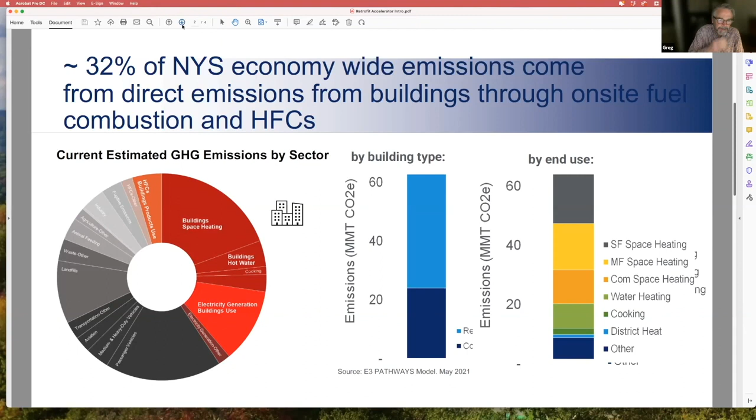So why do we focus on buildings? Probably don't have to jump up and down on this for this audience, but a third of our emissions economy-wide in New York State come from direct emissions from buildings through on-site fuel combustion and the release of HFCs from refrigerants. If you add in the electricity use in buildings, that number goes up to about 45%. Eventually that will shrink to zero once we get to the zero carbon grid, but we're still left with a third that we need to get at of emissions from buildings. And if you see on the right, it's largely from space heating. About 2/3 of it is from space heating, big chunks from single family and multifamily, and then water heating and cooking. Next slide.

So the Climate Act set up something called the Climate Action Council, which is a body that was supported by a number of different working groups, including one on buildings and efficiency, that has come up with what's called the scoping plan, which is all of the strategies that are being recommended or would be required to reach carbon neutrality by mid-century. One of the chapters is about buildings. That's where I will focus now. We're currently in a public comment process. If anybody's interested, please submit comments on this. There is staunch opposition from the likely suspects, fossil fuel industry, et cetera. So positive comments are really important, and there are 6 different sessions coming up to make public comments. You can just send written comments in as well.

But some of the really important strategies here are about regulation. We want to do everything we can about market development, reducing the cost of these projects, supporting innovation, et cetera. But in the end, to get to these goals by 2050, we need regulation. One of those is about new construction. We have a proposal on the table right now for an all-electric new construction code requiring all-electric, no fossil fuel or oil hookups, no later than 2027. And then we're talking about 2024 for single-family houses.

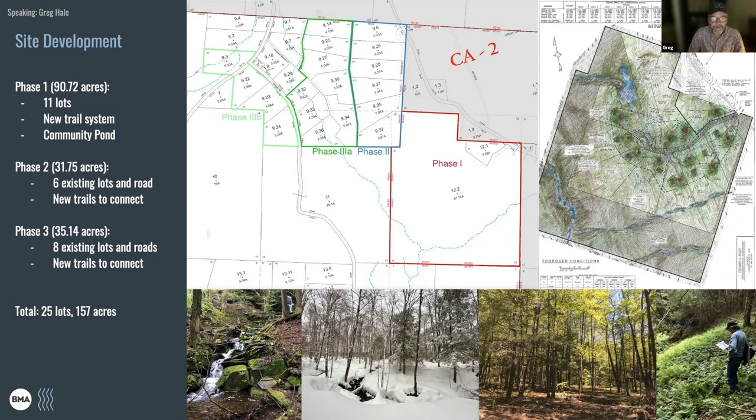And then the darker shaded area is the conservation area. And you can see the streams that come through and a lot of topography, a lot of falling water. Then we've got 2 more phases coming up. We've bought phase 2 already, that's in blue, and are supposed to close on phase 3 next week. So it will be a 25 lot project, about 157 acres, a little over. Next slide. And then where we are in the process right now, as Buck said, we started working on it in 2018, got our subdivision approved finally in 2021, but we were doing a lot of site work beforehand.

So we built our community road, our stormwater management system, our trail system. We have completed our model house now with the site work and slab pour and the shell erection by Bensonwood, and then the finishing from the assembled house by Bensonwood. And so pretty exciting. We've closed on our first contract on lot 4. You can see that down toward the bottom right there. Site work has begun on that.

And we've just signed a second contract, which we're trying to catch up to the first one in Bensonwood, so that we're looking to have 2 house raisings this July, and then be working on finishing those houses over the next 6 to 8 months or so. And obviously actively working on selling the other houses in the lot.

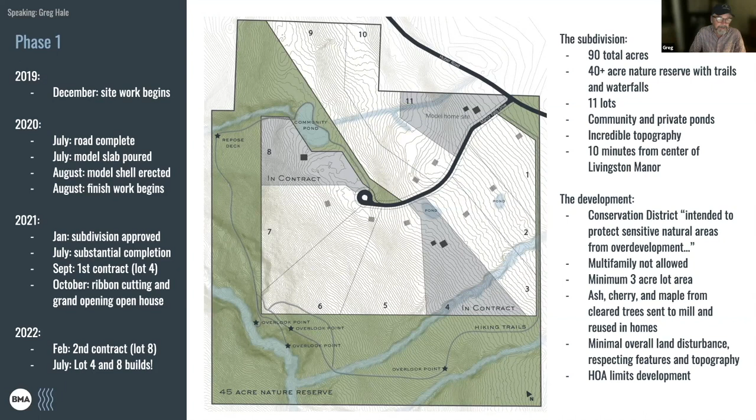So next slide. So just one thing that I think sets us apart, right? We talked about this being on a community basis. So we've actually put these restrictions into our declaration of covenants, restrictions, easements, et cetera, and this has been recorded against the whole property. So everyone needs to live by this, and it precludes fossil fuel from space heating, water heating, cooking. You're not allowed to use a fossil fuel backup generator unless it's secondary to electric battery backup.

No fossil fuel powered recreational vehicles. So this is all, and actually there's another one in here. I'm not sure if it's on this page, but if you don't elect to have solar on your house, then you're required to buy 100% clean energy through a community solar or some other system. So we're really trying to figure out how we can ensure that this is in fact a carbon neutral community.

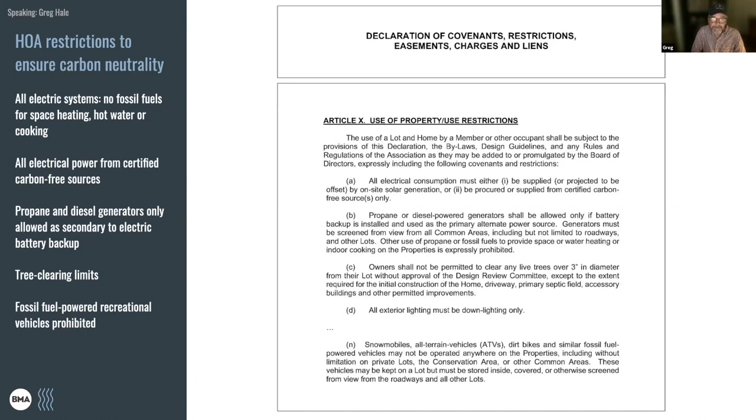So with that, that's the end of my piece of this. I believe we turn it back to Buck.

Thank you, Greg. With respect to design, that mission is the foundation of and embedded in our architectural program for the project. Modern rustic is a guiding design goal. Lots of glass open to the natural environment. We concluded very early to implement the project utilizing prefabricated panels. We decided very early to partner with Bensonwood. We did not have any sketch plan for the house at that time.

We were heading toward a smaller scale house, max 2,500 square feet, 2-story, 3-bedroom, expanding into outdoor rooms and outdoor spaces. Bensonwood has its Unity line of homes. We studied those models. We asked what the important parameters were that were to be respected when we were to consider modifications. In the studio, we tested potential plans against the Unity models. We selected the Unity Värm line, ultimately the Värm 124, as our best starting point. We then explored floor plans within that model's framework and did the same analysis in section and elevation.

We assembled a presentation and made a second visit to New Hampshire where we explained this work, looking for Bensonwood's feedback with the goal to keep the project as one that worked within their existing fabrication system and had not crossed into the world of custom. It was a productive meeting. We received what I would call maybe a gold star. We had, quote, colored within the lines.

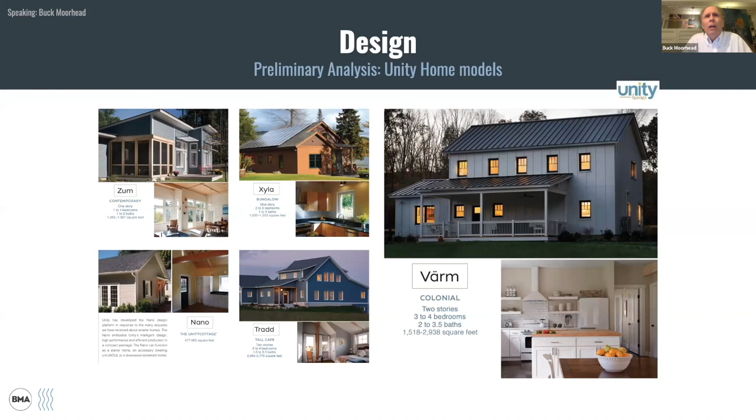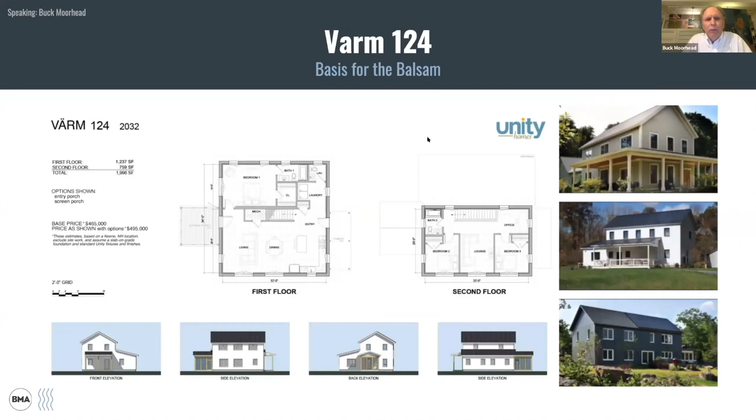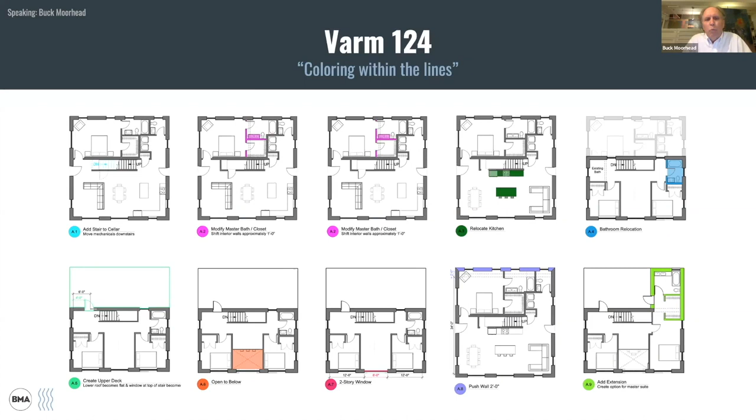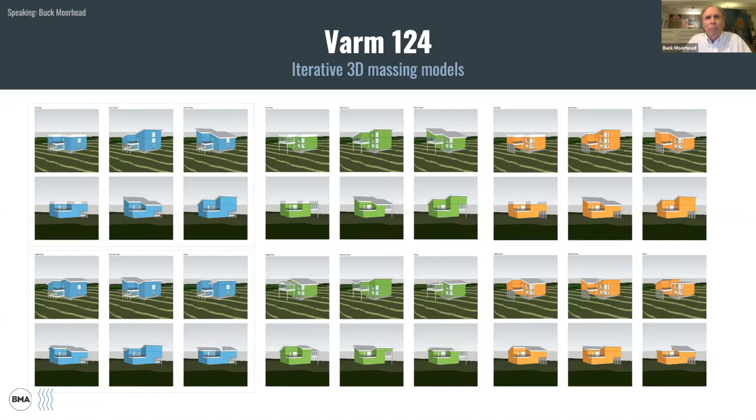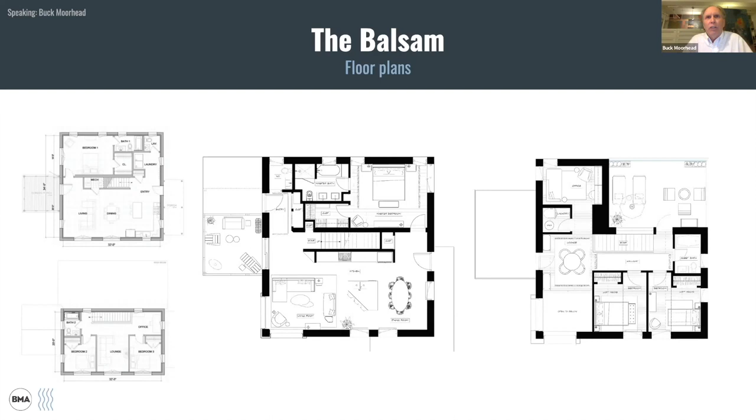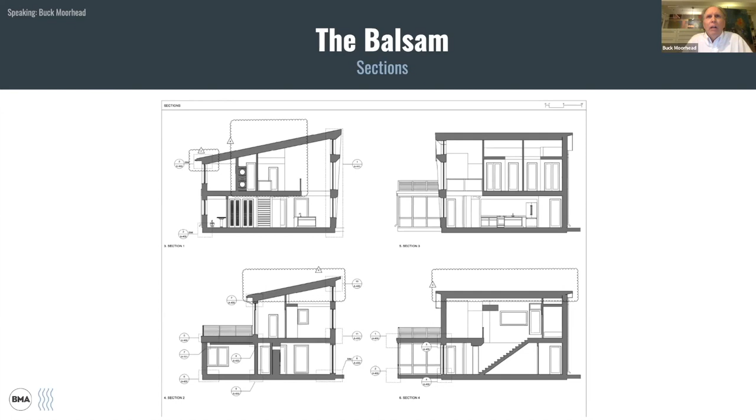The model itself is located on an existing subdivided lot with well and septic. We sold the existing modular home for reuse. We broke up the existing slab it was on and used that in our new road construction. The model is on the same location and oriented to the south. We have built a 2-story accessory building, garage below, studio, home office, guest room above, and our PV solar array will be above the roof of that accessory building. The 2 structures together create an outdoor room which is oriented to the south and west and to a prime longer view on the lot.

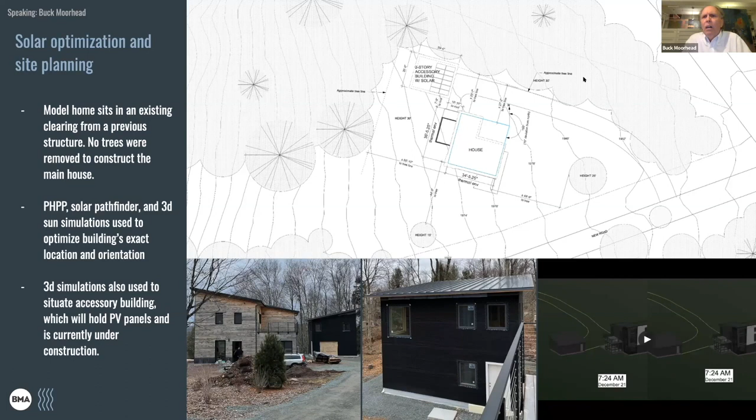One of our 2 new houses will be the same Balsam model with a 1-story garage with solar PV on that garage roof. We did a series of sun studies, which are there in the right-hand corner, just to make sure that we minimized the house actually shading that garage roof with its solar panels. Our second new Balsam house will have a ground-mounted solar array. Next slide, and I'll pass this baton to Laura, who will review some passive house details.

Yeah, so one of the great things about working with Bensonwood is that they were already really advanced in their approach to high performance buildings. So we didn't have to explain why we want massive amounts of insulation in the walls. We didn't have to tell them what an air barrier or an ERV was, or explain why we need triple pane windows. And one of the great things about working with panelized construction in general is the opportunity to work through all of the construction details literally down to the nail months before anything is actually built.

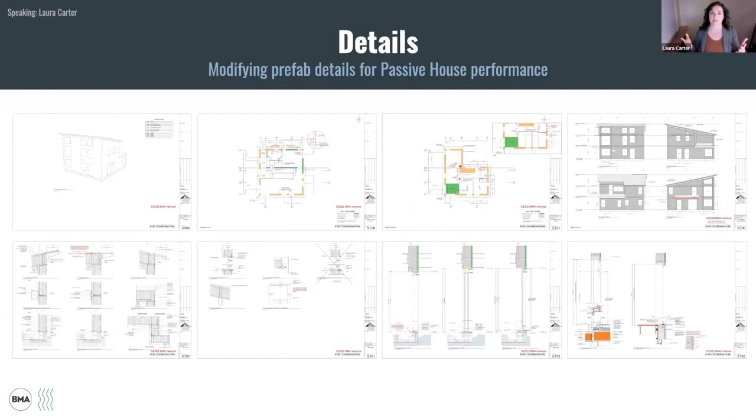So that coordination process was really interesting because not only are you discussing and detailing for the design intent, but you also have to talk about what the fabrication equipment can and can't do. You have to keep in mind that you can't request or discuss a change to a detail in the middle of construction since it's all pre-programmed. And you have to really anticipate what your rough-in and finish contractors will need, more than usual, because there isn't a GC just coordinating all of this as a building goes from the ground up.

So given all of these challenges to our normal process, we were really fortunate to be able to start off on the same page with Bensonwood and use their stock wall and roof assembly details. So these are things that they already had programmed into their computers, already had certified by third-party engineers, and that their workers were already used to assembling. So here you're looking at the wall and roof assemblies that we ended up with on the house.

The meat of the shell, I guess, is 2x10 walls and 16-inch TJI roofs, both 24 inches on center and infilled with dense packed cellulose. Working towards the exterior, there's a 40 millimeter Steico fiberboard panel on the walls, a tapered layer of EPS on just the flat roof portion, and then zip sheathing on the roof and a SIGA membrane on the walls for our WRB layer. I do want to note that the SIGA membrane here is largely redundant regarding weather protection because the Steico is also a WRB in and of itself. But it serves as a nice protective barrier for the Steico during shipping and site assembly.

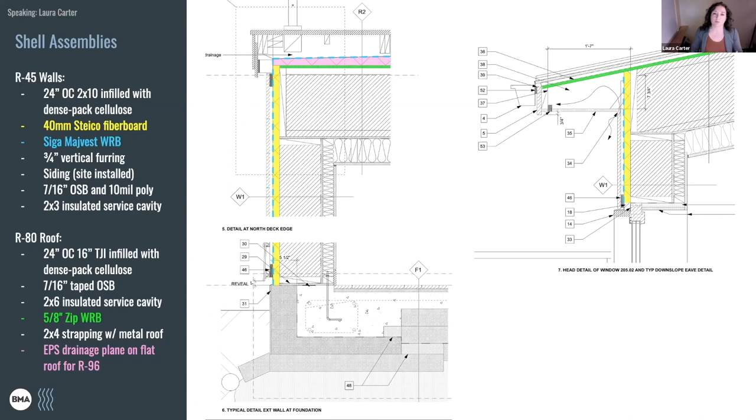It's obviously not impervious to damage itself, but gouges and rips and things are a lot easier to see on a bright blue membrane than they are on the monotone beige brown of the fiberboard. So before Bensonwood left the site, they could very easily just take a lap around the house and find any points of damage and tape them up. Beyond that, the rain screen siding and a standing seam metal roof complete the exteriors.

On the inside, taped OSB sheathing forms the air barrier on the walls and roof, and those connect to a 10 mil poly layer under the slab. And then finally, we have 2x3 and 2x6 stud cavities on the interior to give us a nice rough-in space for plumbing and electrical, which we infilled with insulation after all that rough-in work was complete.

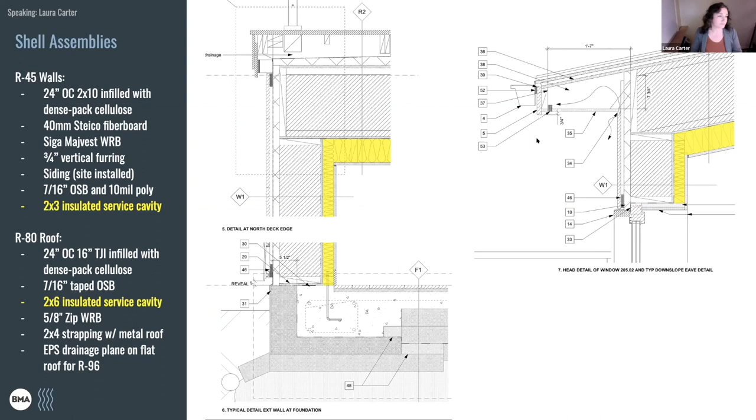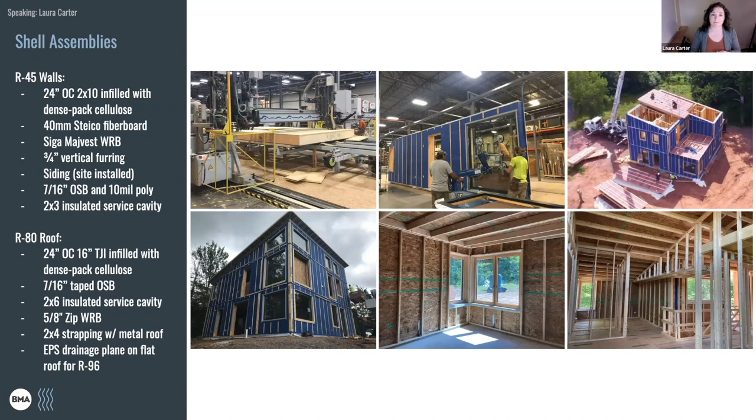So our PHI certifier, who has been really, really great through this process, has also been really specific about our details. One of the big specificity hurdles we had was working out thermal bridge and condensation issues with our windows. We have 8 different types of windows or doors on this house, making 16 unique head and sill connections that our certifier asked us to model. He also asked for 8 additional construction details that have nothing to do with the windows, so we had a lot of these conditions to go with. He relaxed a little bit on some of the window details that were really similar, but I think we still ended up with 15 or 16 models to do.

Fortunately, we had Ed May on board. I don't know if he's here tonight, but he's a very patient and kind person and didn't seem too annoyed by the amount of details I kept sending him. So anyway, I'm happy to answer questions about why we had so many unique conditions on a relatively compact house, but I will spare the general audience for now.

One thing I won't spare you is this specific window detail that was actually a bit of an experiment for us, and hopefully Buck doesn't mind me saying that, but it seems to be working exactly as intended. So because the windows are all installed in the panels at the factory, the exterior waterproofing layer is also completed at the factory, which is of course a critical benefit of doing construction this way. All these important systems are constructed and completed literally under one roof, and there's one point of responsibility if there's ever an issue or repair is needed. The very specific, I suppose, downside of that, at least in this case, occurs at all of our windowsills.

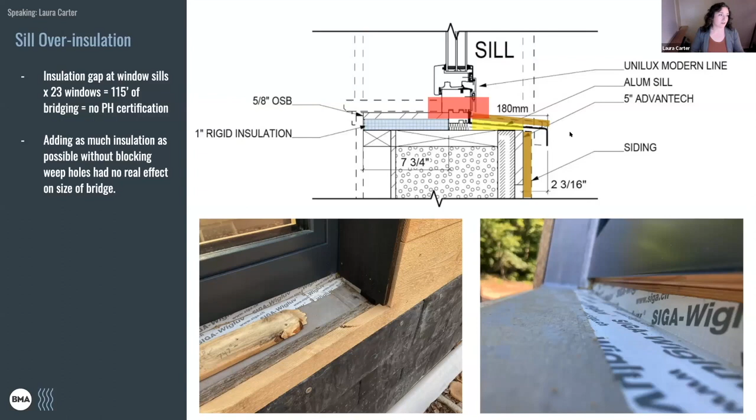So we ultimately ended up with this kind of delightfully analog solution. We took rigid Rockwool ComfortBoard, cut it lengthwise to fit each window, and then we used a very scientific process where one person stood on the inside of the house with a window open and poured water into the bottom of the frame, and another person stood outside the house and marked exactly where the water came out of the weep holes.

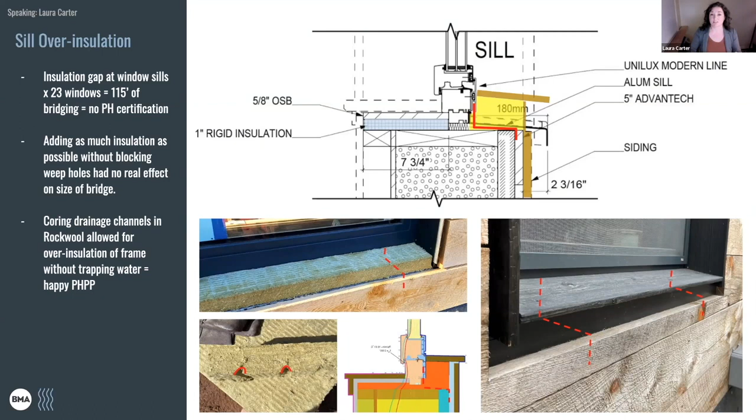Then we cut small channels into the back and the bottom of the Rockwool, lined up to those marks to create little drainage pathways. So now the water drains freely, the frame gets a lot of much needed over-insulation, and we were pretty much instantly back into certification range.

One other quick detail I want to show here is how we address the bridges at our first floor door thresholds. So this is a first round coordination detail showing the door in the middle of the insulation layer of the wall, which puts it just off of our concrete slab. So that's the edge of the slab and our door is sitting outboard of that.

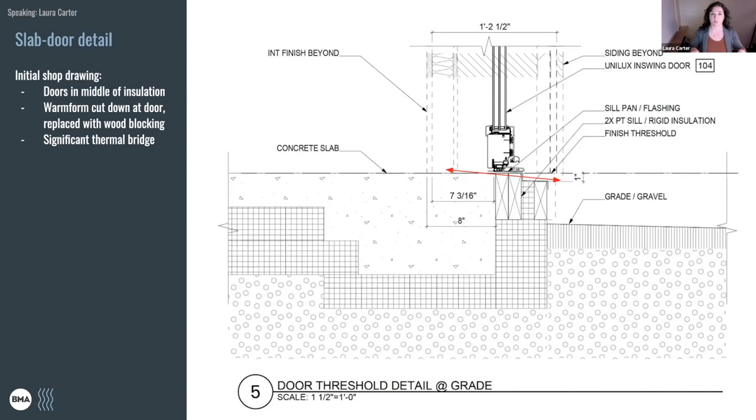We are using Warmform for the slab insulation, and the initial thought was to cut down the Warm Form slightly and put in wood blocking there to help support it. This unfortunately would have created a very clear bridge through the wood and the concrete. Not only is this a problem for PHPP, but it just wouldn't be comfortable underfoot because you'd end up with these really cold spots on the floor every time there was a door. So our finished floor on this level is just the exposed concrete slab. So there's not even a layer of wood flooring on top of that to help warm it up a bit.

So our solution to this was to pour the concrete around a high PSI block of EPS that we placed under each door, with each block being about 16 inches wider than the door, and then pulled the doors inward a bit so they rest fully on that insulation. That allowed us to cut down the Warm Form on the exterior so we could inset a saddle without having a big thermal bridge under the door.

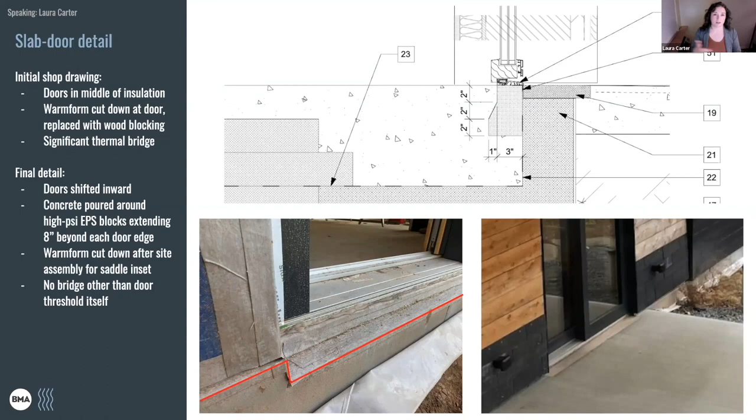So that is a very rapid fire run through of just a couple details on this house, but here's where we're sitting right now. Construction is complete and we are at 9.12 for our heating demand, which is below the 9.51 threshold for low energy building certification, which is what we're aiming for here.

Our last blower test was really good on the depressurization side at 0.43 ACH. Not quite as good on the pressurization side, which we think is due to a magnetic damper that didn't get installed in our range hood exhaust line. So fortunately, a pretty easy fix, all things considered. The final commissioning of the ERV will happen in about 2 weeks, and then we'll be at the mercy of that very exacting certifier. So wish us luck and come visit the house, and I will kick this back to Buck now.

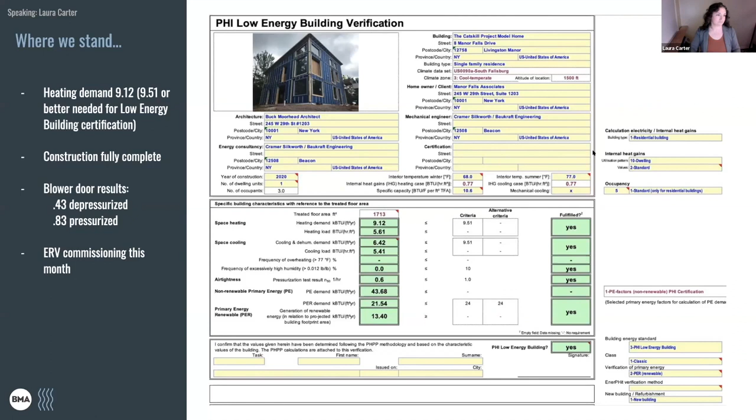Thank you, Laura. With respect to systems, we have a 1.5 ton air-to-air heat pump. It's Fujitsu in the model. We expect those to be Mitsubishi moving forward. A Zehnder ERV system. We have a ducted range hood exhaust, even though we are all electric with induction cooking.

We constructed an insulated makeup air panel camouflaged into the siding, operated by a window operator, which will actually be a linear actuator on future builds, synced to operate this panel simultaneously via a relay switch with the range hood control.

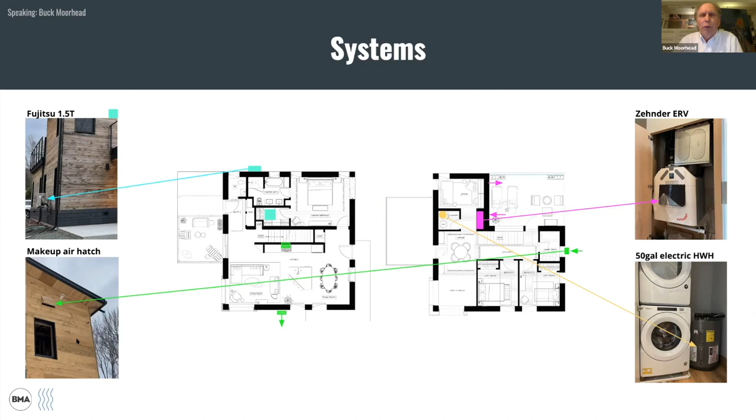We have an electric hot water heater. We switched during the design phase from a heat pump hot water heater. We have Cramer in attendance, I hope, and hopefully he can assist us during a deeper discussion on this during the Q&A. Next slide, Laura. Here are the mechanical plans for the first and second floor.

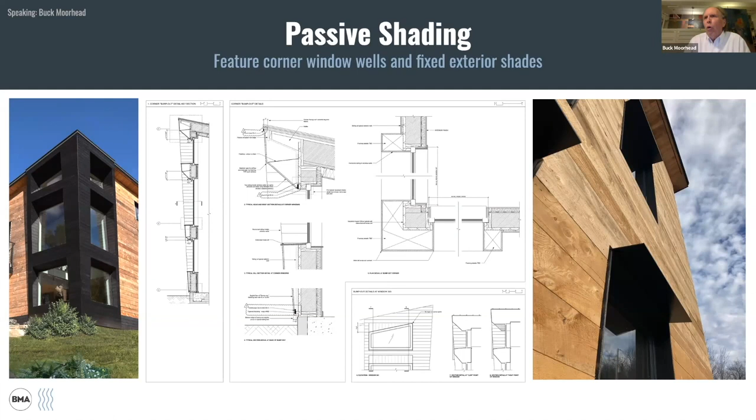We will track overheating this spring and summer and early fall to have more precise understanding of potential overheating. The house is unoccupied and was overheated occasionally this past summer when I walked in, but was rectified by just opening a couple of windows.

Next, please. We wanted to test the resiliency of the house. In this rural area, when electrical power goes out, it might be for an hour, but once in a blue moon, it could be for a week. So we intentionally shut off the heat in mid-January this year for 6 days. We left the ERV running. We did not drain the plumbing, which freaked out some people on our team or outside of our team.

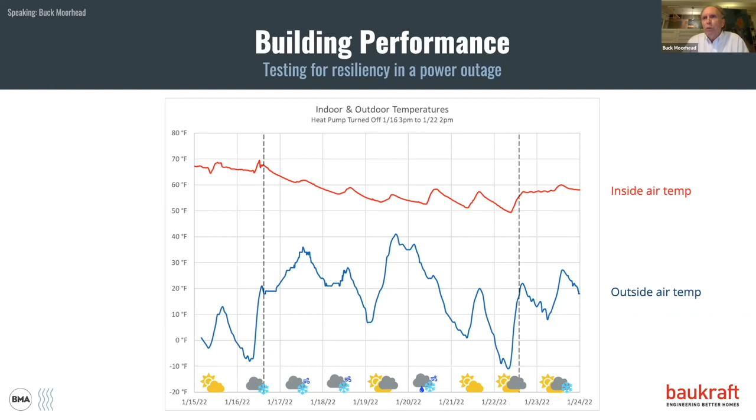The weather was not full sun. It was snow flurries, some cloudy days and the such. But as you can see through this, the temperature never dropped below 50. And I appreciate Kramer's help. He set up a couple sensors in the house and put the app on my phone. And I was glued to my phone for those 6 days. Next, please.

We made a decision early in the design phase that we should be thoughtful about the embodied energy in our materials. As stated earlier, our mission is rooted in regenerative design and circular economies. Bensonwood was a strong start with respect to their base wall and roof systems, wood framing, fiberboard, dense packed cellulose.

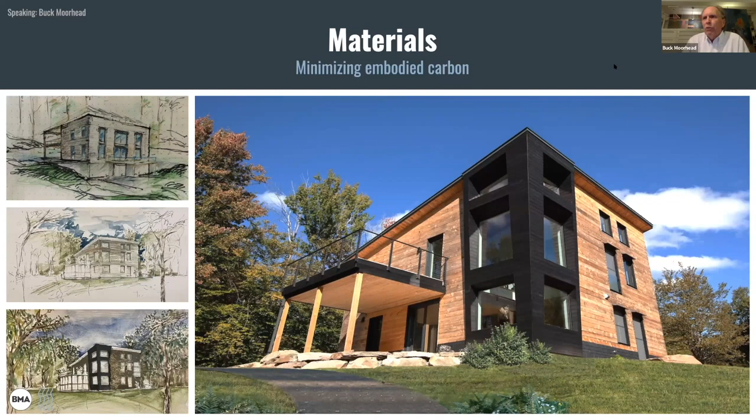Next, please. With respect to the exteriors, the siding is predominantly green local hemlock, untreated. We have Cupaclad at the base, which is a slate product that is completely demountable and reusable and great in the snow, very much excellent in terms of its circular economy attributes. Shou sugi ban in some locations, fire retardant and insect resistant.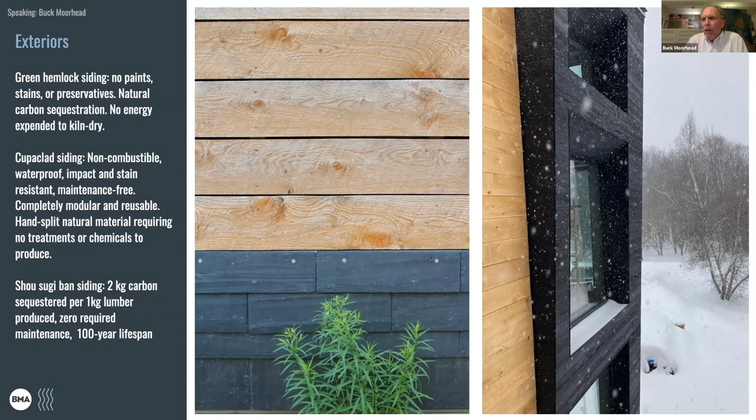We have a metal roof, not so great with respect to embodied energy, but obviously good at keeping water out and part of the local vernacular. Our concrete slab, not so great. We're looking for a supplier with some fly ash that we can use as an additive. We have a Warmform underslab insulation, which is EPS. We're looking to replace some of that with some Glavel in one of our next builds.

With respect to the interior, we have site harvested wood from the property, ash for flooring, cherry ceilings, soft maple around the kitchen. We use Richlite counters, which are recycled wood pulp. We have Stickbulb fixtures, which use reclaimed heart pine. Next, please.

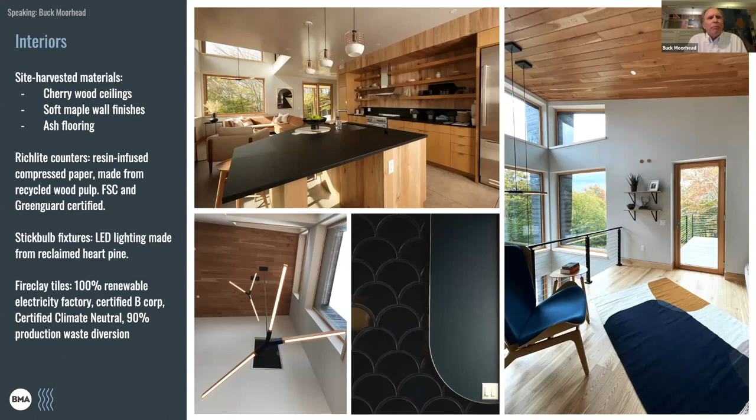We started tracking utilizing EC3 in 2019. EC3's library of materials was evolving then and probably still is now. We inputted what we knew on our end and could match in their libraries. Others are based on industry averages, which EC3 does automatically. Based on this analysis, we were 91% better than the baseline for current carbon intensity of construction for similar buildings established by the Carbon Leadership Forum.

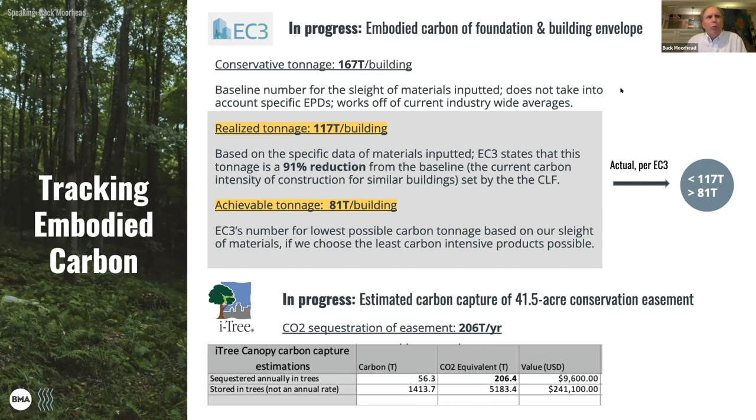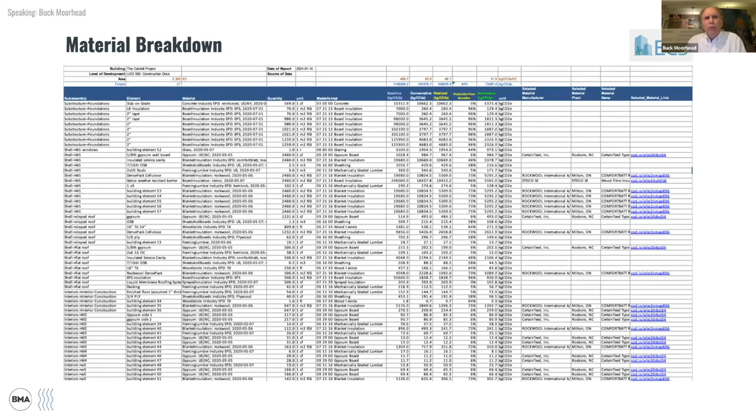The lower spreadsheet, we used iTree to try to understand the sequestration potential of the conservation easement we've established, as well as the value of cutting as few trees as we can in developing the project's infrastructure on the lots themselves. Next slide, please. This is the EC3 spreadsheet that was the basis of the results for the preceding slide. We still have a lot of ongoing work to do, I think, with respect to tracking the carbon. We'll just click through some.

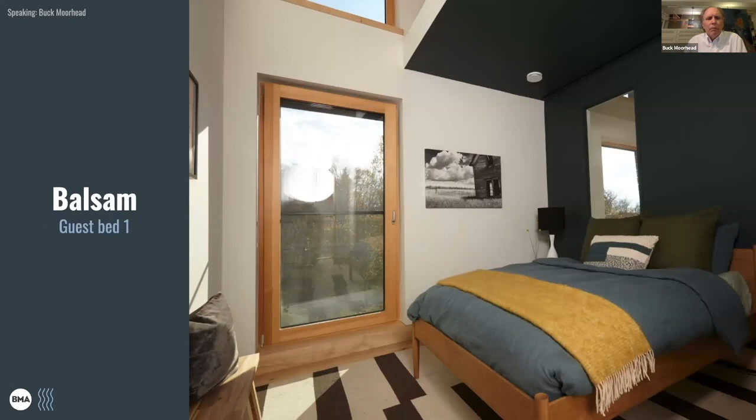These are some interior photos just to give you a sense of how the interior showed up. Lessons learned. Our interior wood flooring had some serious problems of gapping as the unoccupied house became very dry in the winter. We are looking to adjust our milling detail for the flooring. We're going to pay more special attention to the flooring install over the concrete slab on the first floor and consider adding some humidification.

We added snow guards on the roof after we had a massive snow dump that actually blocked access from the house onto our upper deck because the snow had frozen out there. As Laura mentioned, we are going to incorporate magnetized range hood dampers that will help us better with our pressurization air barrier tests, blower door tests. And we learned that manual operators for high awning windows can be problematic. Next, please.

Future considerations: as I mentioned, we're looking to Glavel to replace some of the under-slab EPS, and fly ash concrete. We're going to be considering hot water options to optimize the hot water energy usage with respect to client use requirements and energy optimization. We want to incorporate gray water and rainwater collection into future houses. We're going to monitor the frequency of overheating, as I mentioned, this summer, and we're going to add a third temperature monitor at the second floor.

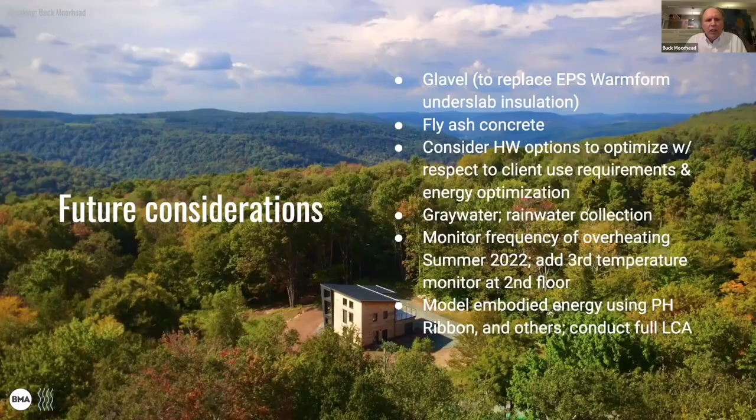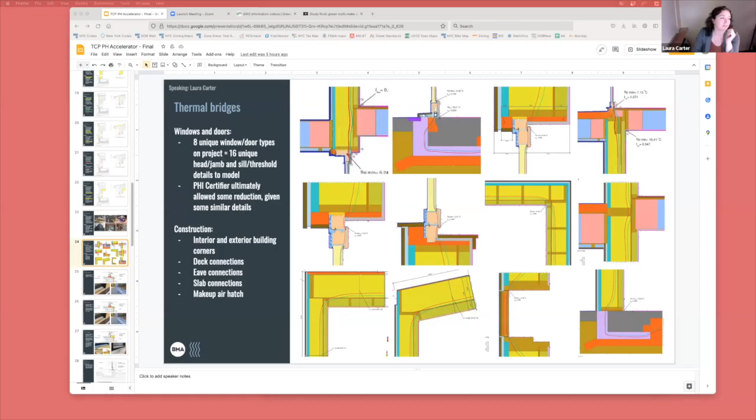Maybe, Laura, you know more about those lines in the THERM models of that lovely slide that I've already copied twice, and if you have an opportunity, post it one last time. I will happily post it, but I absolutely cannot answer that any better than you did. Great, Rick. So we're gonna default to Ed May for the answer, but you can see the green and the red lines. The fact that they're straight is great.

In the left center one where there's bending, at least you're not getting collisions, but that's why they've insulated that, because if they didn't put in that orange insulation, you could get condensation happening there, and that was a bit of a concern. Most people never even understand this detail, and they recognized that as a potential issue for condensation.

The other default that maybe in the future you guys consider is that rule of thumb: you align the middle of the glass to the middle of the R-value of the insulation of the wall. I'll leave you guys with figuring out the math of that, but that's a default. We were actually able to do that. The detail we're looking at here, top row, second from the left, that's a sliding door. There's only one of those on the project and the rest are swinging.

So for the swinging doors, we were able to get the whole door frame really solidly inside the insulation layer. It's not exactly on center, but it's pretty good. This sliding door, because it has such a massive threshold, could not quite do that. So this is that jog in the THERM layers, and it's sitting on the concrete a little bit. That's definitely the worst example, but something to strive for. The nice thing is we get 25 tries to do this same house really well.

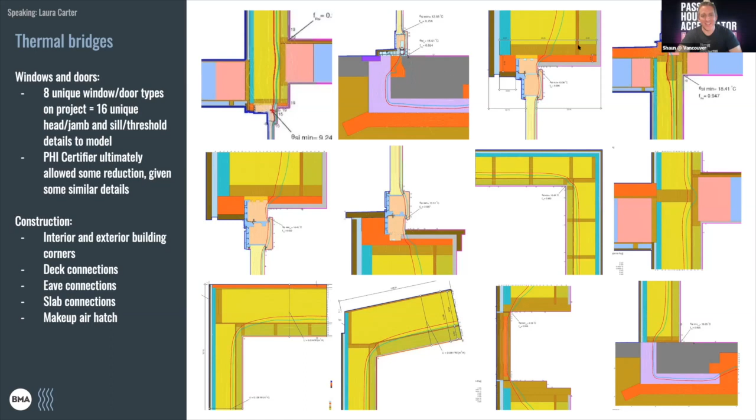So, like you said, this is a mock-up. It's done really well, and the fact you can fine-tune it is great. And you have a great team. This is the whole thing. We're not all proficient in all this. This is why we need a team to chime in, have discussions and make things better.

One thing that James asks is, where exactly in the Catskills are you? Because he really wants to come see it. He's close enough where he's nearby. So yeah.

We're just outside of Livingston Manor, about 5 or 10 minutes away from Livingston Manor. If you Google 302 Huber Road, you'll get a point.

You'll find us. Well, hopefully we'll again have an opportunity to get to New York for some event, and we can do a road trip, because I know James has a Passivhaus pub for all of us to get to. We've got this project to see, and we've got other ones. So, yeah, if James wants to, definitely let us know in advance. We'd be happy to meet you out there.